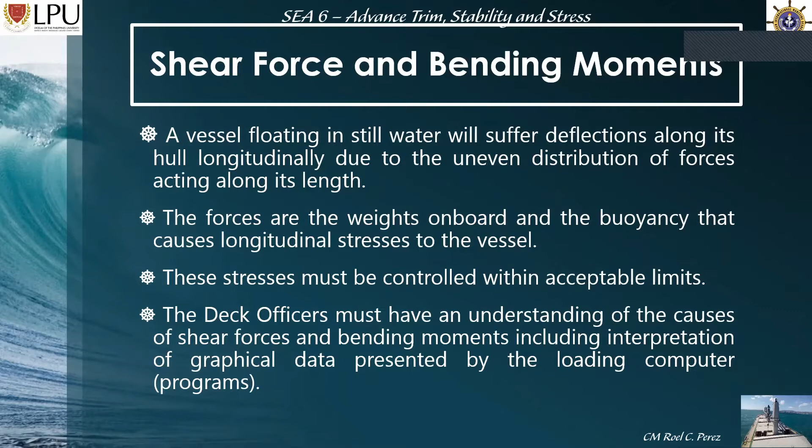A vessel floating in still water will suffer deflections along its hull longitudinally due to the uneven distribution of forces acting along its length. The weight of the ship, that is already a force. The ship is heavy and displaces water, so it has a force acting downward which is the weight, and it also has a buoyancy force acting upward.

If this is your center of gravity, that force acts downward. If this is your center of buoyancy, it is acting upward. They oppose each other but they have the same magnitude of force.

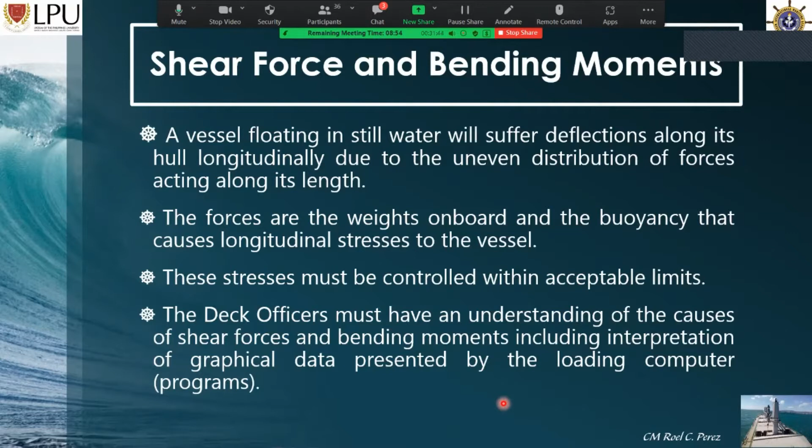Shearing forces and bending moments are experienced by a ship because of uneven distribution of weight and buoyancy acting on the vessel's length. A ship will displace a mass of water equal to the displacement of the ship in light condition. You know this already, the Archimedes Principle: the weight of the vessel, or the weight of the water displaced, is equal to the weight of the body.

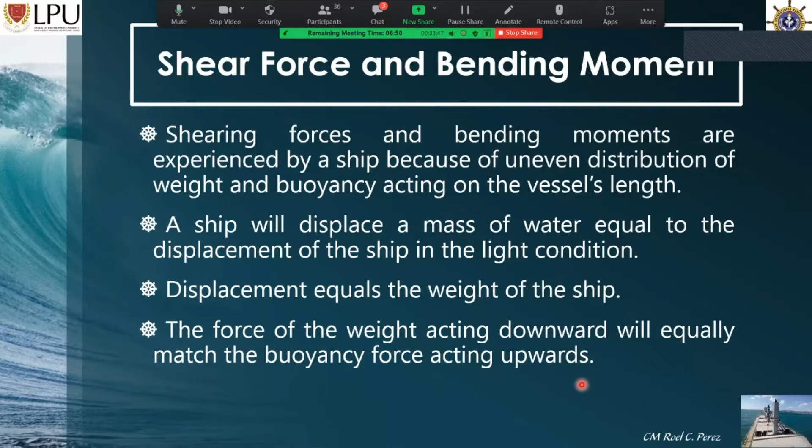Here is an example: a box-shaped vessel with three equally spaced cargo holds with light displacement of 12,000 tons. There is no stress because the holds are of the same length and the distribution of forces throughout the length is equal. For example, here there is no cargo. This is your box-shaped vessel, with no cargo, and part of it submerged. This is your waterline, and the ship is submerged, so your displacement is 12,000 tons.

Now, since the forces acting upward are equally spaced, we can divide 12,000 by 3, giving 4,000 each. So 4,000 is the upward force, which is the buoyancy force, and 4,000 is the weight force acting downward. As you can see, the weight force is equal to the buoyancy force, so there is no stress, it's fine.

Okay, and then when a weight is loaded in one of the holds, there will be an uneven distribution. For example, we load 9,000 tons in cargo hold number 2. So if we loaded 9,000 tons in cargo hold number 2, which is trimmed, I should have put trim there.

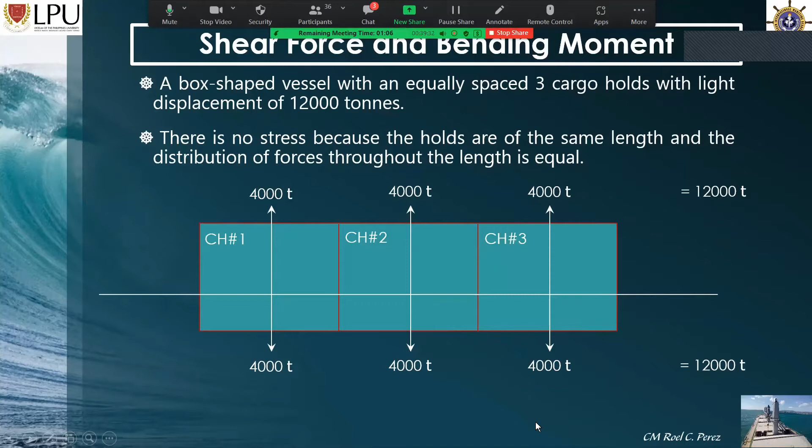But here, the buoyancy force is now more than the weight force in cargo hold number 1. And in cargo hold number 3, it's the same, there is already a difference of 3,000 tons in force. And for the weight force, there is a 6,000 tons difference.

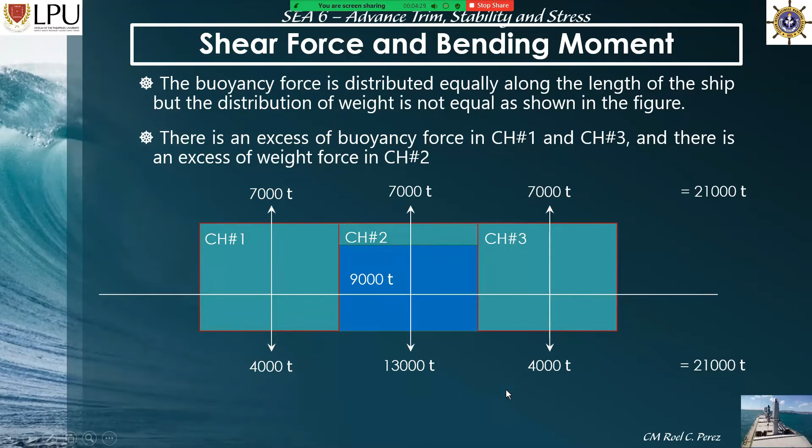And there is an excess of weight force in cargo hold number 2. Like this: 7,000 and 13,000, there is a 6,000 difference of force.

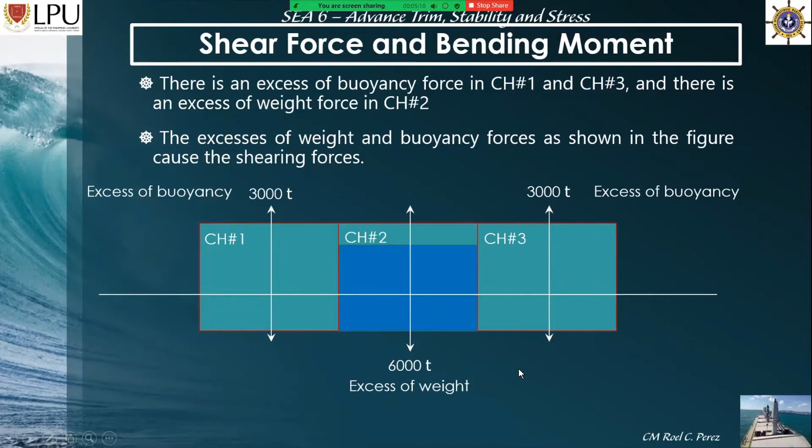Okay, so here is the difference. The excesses of weight and buoyancy force, as shown in the figure, cause the shearing forces. In cargo hold number 1, there is a 3,000 tons excess of buoyancy, and the same with cargo hold number 3. For cargo hold number 2, there is an excess of weight, which is 6,000 tons.

Okay, shear force and bending moment. Shearing forces are the vertical forces acting on the length of the ship and tend to slice the ship into different parts. Because of the shearing forces acting on the ship, bending moments will also be experienced by the ship. If the weight is concentrated in the middle of the length of the ship, sagging will be experienced by the vessel. If the weight forces are concentrated on the ends of the length of the ship, then hogging will be experienced by the vessel.

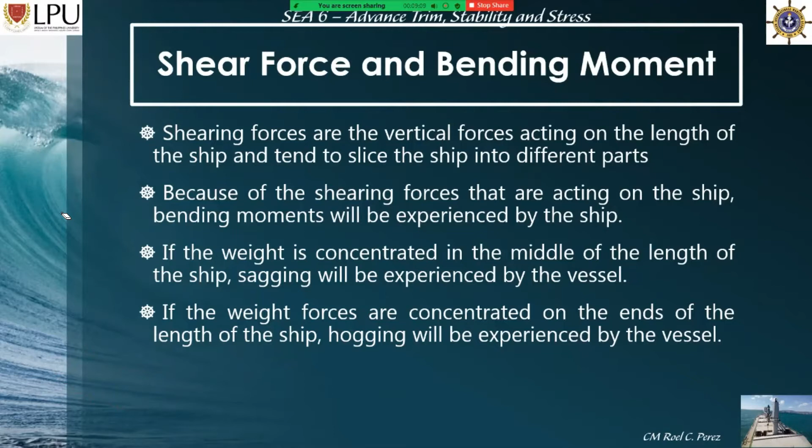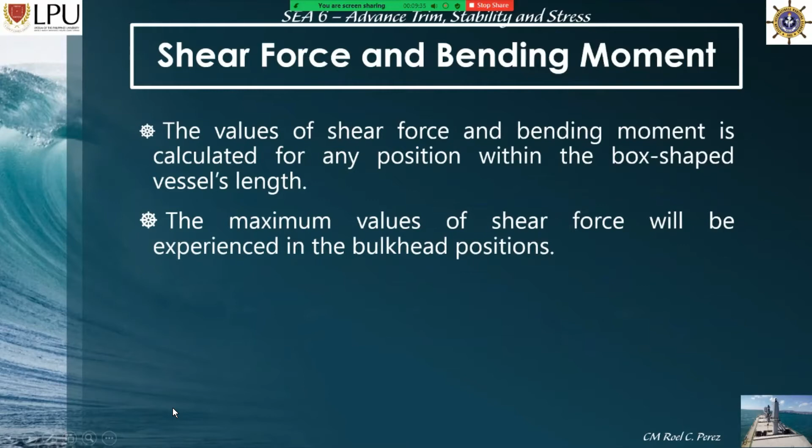Okay, so the values of the shear force and bending moment is calculated for any position within the box-shaped vessel's length. The maximum values of shear force will be experienced in the bulkhead positions. Kung nakita nyo, kung matandaan nyo yung aking drawing, ito yung drawing ko. Kung matandaan nyo ito, ang kanyang maximum, ang nakalagay doon sa aking sa ating lesson, the maximum values of shear force will be experienced in the bulkhead positions.

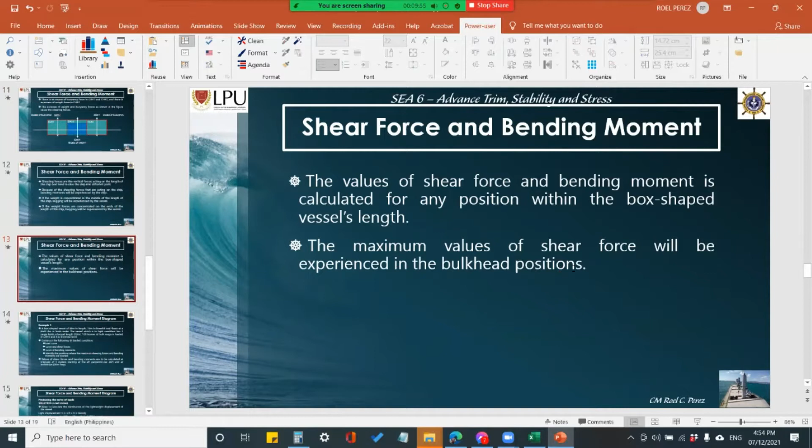Dito sa bulkhead position, ito ang bulkhead, yung hati ng bodega. Which is, kung makita mo ito, di ba? Kaya yung maximum shear force, parang kumbaga, parang magganyan siya. Pero hindi naman siyempre, bali babaluktot lang siya, magiging sagging. Kung dito ka naman nagkarga, sa dalawang gilid, magiging hogging naman, aangat naman yan.

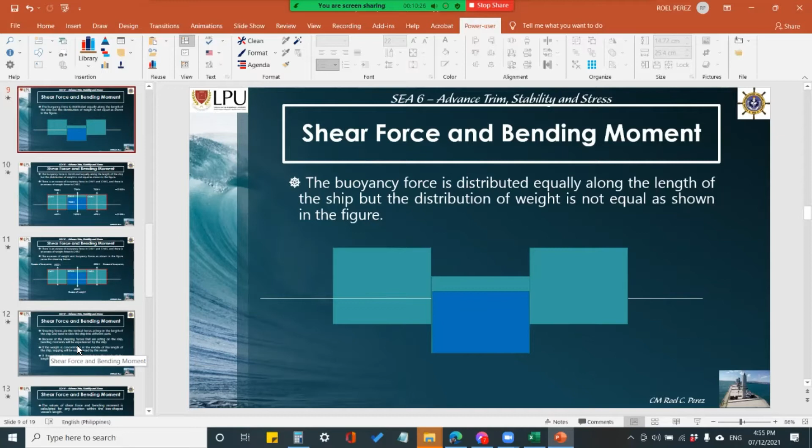Okay, so ituloy natin. Then, we have an example. Para mamaya, activity tayo. Kahit hindi pa ako tapos, at least kahit dito man lang tayo sa load curve.

Okay, so example 1: a box-shaped vessel of 60 meters in length, 10 meters in breadth, and floats at a draft of 4 meters in fresh water. Kaya fresh water ang ginamit ko muna, mamaya ipapaliwanag ko kung bakit fresh water. Kasi ang fresh water, ang specific gravity or the density is 1, di ba? Kaya mas madali mag-compute. Okay, the vessel which is in light conditions has 3 cargo holds of equal length.

So kaya 60 meters ka, tatlong cargo hold, o di siyempre 20 each, di ba? Siyempre iba yung, wag mo isipin yung sa barko, kasi sa barko ay, okay, so let me, para maintindihan nyo. Siyempre yung barko ay hindi siya box shape. Okay, forgive my drawing. Tapos may bahay tayo dyan, di ba?

Ay nandiyan ang makina, tapos ito lang ang ginagamit mo sa bodega. Kung ilang bodega yan, 5. Pagdating dito, wala na namang yung space na yan. So hindi, iba yan. Huwag mo munang isipin yan, may advance na tayo dyan, then muna tayo sa theory.

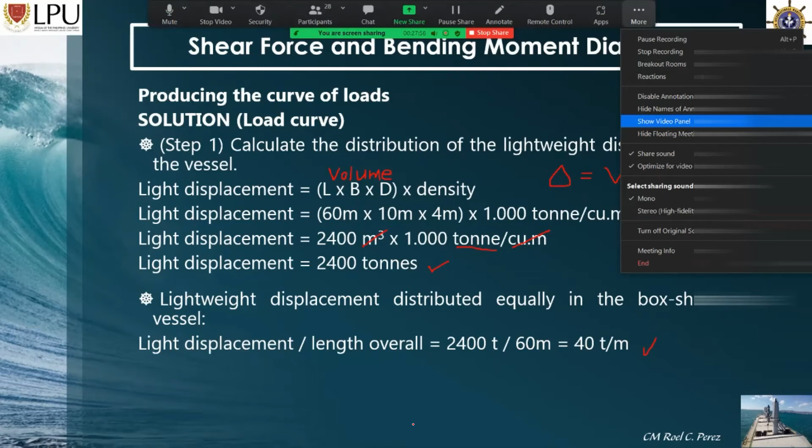Ano, naintindihan ba? Yes, na sir. Paano? Okay, yes, sir, madali lang naman intindihan, you know? And you are lucky because I believe na hindi nila ginagawa ito doon. Pero kung ginagawa man nila, hindi nila gagawin yung graph, which is tayo gagawin natin.

Ha? Okay, na step number 2. Ganun pa rin, solution for load curve. Calculate the distribution of all deadweight items, that is your cargo.

Okay, so cargo equally distributed in cargo hold number 2, that is trimmed. The formula is cargo divided by length of cargo hold number 2. So 120 tons divided by 20. Nakita nyo naman yung kanina, 100, yung 20 is length of cargo hold number 2 kasi 60 meters yung iyong length. So the length of your cargo hold number 2 is divided by 3 because it is composed of 3 cargo hold in equal length, nakalagay doon sa ating problem, no? Okay, so 120 tons divided by the 20 meters, that is 6 tons per meter.

That is on dead weight, no? Regarding the dead weight dito, regarding the cargo. That is 6 tons per meter.

Okay, so step number 3, calculate the load displacement and distribution of buoyancy force. So calculate mo yan, and then the formula is load displacement. Load displacement is equal to light displacement plus load weight or dead weight. So okay, malilito doon, ano? Okay, so that light displacement is 2,400 tons plus yung load mo is 120 tons, then your load displacement is 2,520

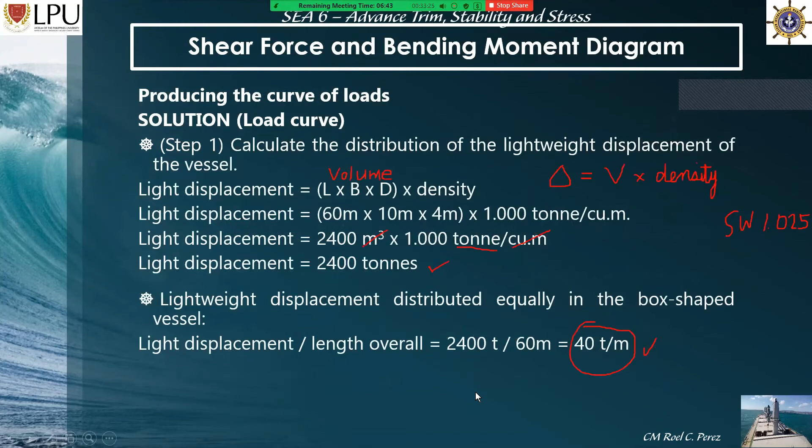Dito naman, on lightweight at saka, okay, so, tingnan natin, no? So, I can write here, keep natin.

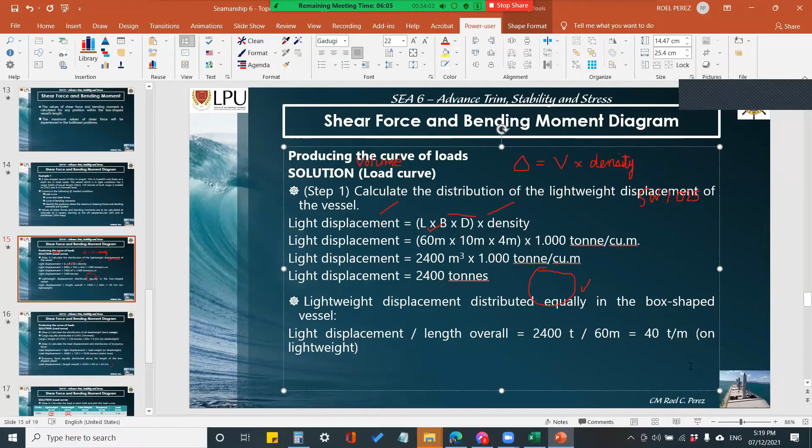Yan, no? That is on lightweight. Tanggalin ko na lang to kaya. Pati, mabasa naman pala.

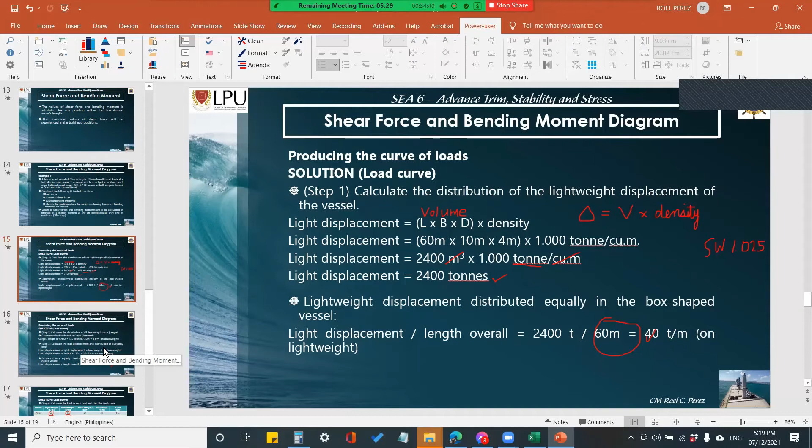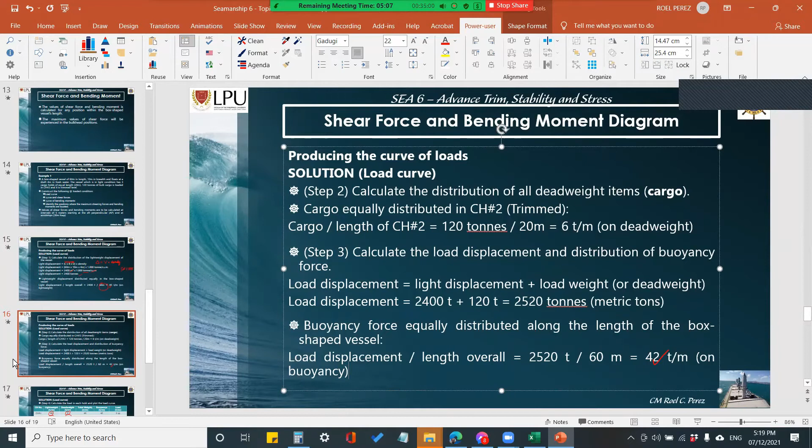Okay, so yung isa naman, nakalagay, sinulat ko na on dead weight. Dito naman on buoyancy, lagay natin on buoyancy or buoyancy force, para matandaan nyo. Okay, so I can go there again.

Okay, so anong mangyayari ngayon? So 40 plus 0 equals 40. Yan, plus natin yan. 40 plus 6 equals 46. 40 plus 0 equals 40.

So tandaan nyo, bakit 0 ito? Baka kasi wala tayong kinarga doon, no? Wala tayong sinolve din. Ito lang cargo hold number 2 tayo nag-solve. Okay, so this one is on, doon natin kinuha sa on buoyancy. Tandaan nyo yun.

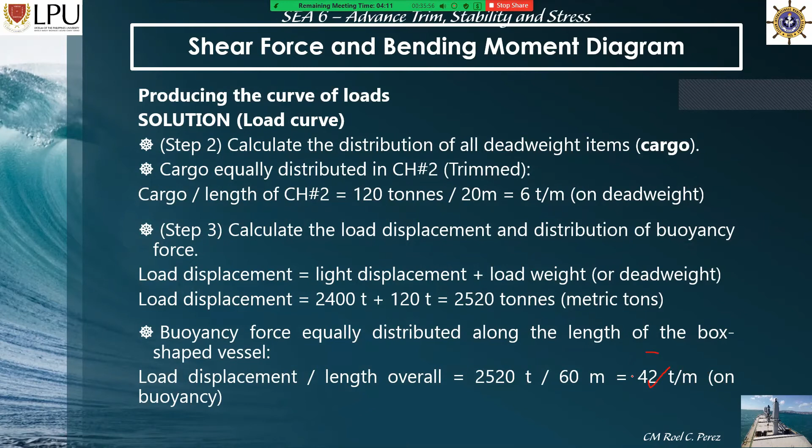On buoyancy. So, babalik ako doon. Nakita nyo ito, no? On buoyancy. 42. So, doon yun, no? 42. Okay, so anong gagawin natin ngayon?

So, tingnan mo, tumaas ba siya? Ilan yung difference nila? Yan, 2. Ngayon, dahil tumaas siya, 2 up. That is your load, no? Dito naman sa kabila, i-subtract mo. Bumaba siya, that is 4 down.

And then dito naman, 2 up ulit, no? So, makita mo, meron ka na yun. So, siyempre, pagka 2, positive yun. Pag 4, negative. Diba? So, ganito ngayon ang ating pag-plot for plotting.

For plotting, we need the x value and y value. So ang ating x value, siyempre, mag-start tayo sa 0 along the length. Along the length ito, no? So, this one is papunta ng... wait. So, this is your cargo hold number 1.

So, this is your bulkhead. Bulkhead. So, this one naman, your cargo hold number 2. Tapos dito na naman sa 40 sa 40, bulkhead na naman yan. And this one is your cargo hold number 3.

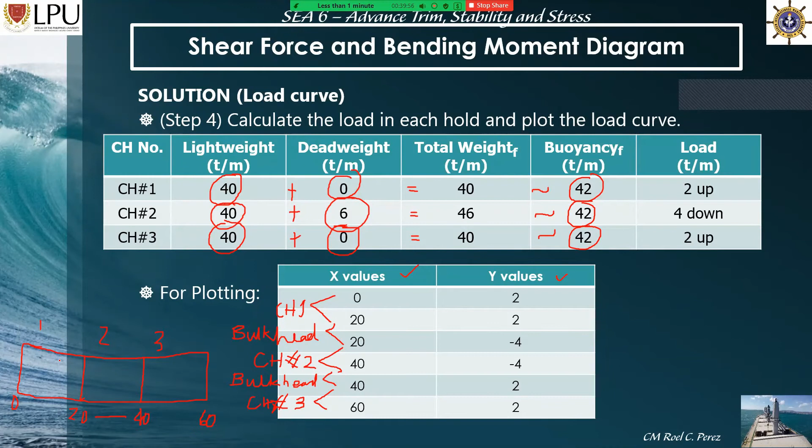Kaso dito, dadaan tayo ng bulkhead. So meron tayong bulkhead in the middle, kaya parehong 20 ang ilalagay mo, no? Kasi nandun ka pa rin sa 20, this is your bulkhead eh. Gets mo? Pwedeng sabihin ng tig-dalawa. Tapos yung pinakadulo, yung overall, yung una, siyempre 0 ka muna.

So ito ngayon gagamitin natin sa graph, no? Naintindihan niyo ba kung saan nakuha yung x values? Tig-20 po lagi, dalawa, depende sa length ng barko, no? Pagka yung barko mo, let's say, 90, siyempre tig-30 yun, gitna nun, no? At saka depende kung ilang bodega.

Kaya ganun nga, from 0 to 20, that is your cargo hold number 1. And then in between that, 20 sa 20 bulkhead yan. Ibig sabihin hindi ka lumipat, nandito ka lang. Bulkhead.

Tapos 20 to 40, that is your cargo hold number 2. Yan. Tapos in between na naman, bulkhead na naman, that is your 40. Kaya hindi ka lumipat from 40. Tapos 40 to 60, that is your cargo hold number 3. Length, no? Ngayon yung values mo...

Okay, so yung Y values, ginamit natin itong up, down. Up, down, and up, no? So 2, galing dito papunta roon, that is 2, no? Ngayon, dahil hindi ka pa naman lumilipat, nandiyan ka lang sa bulkhead, so 2.

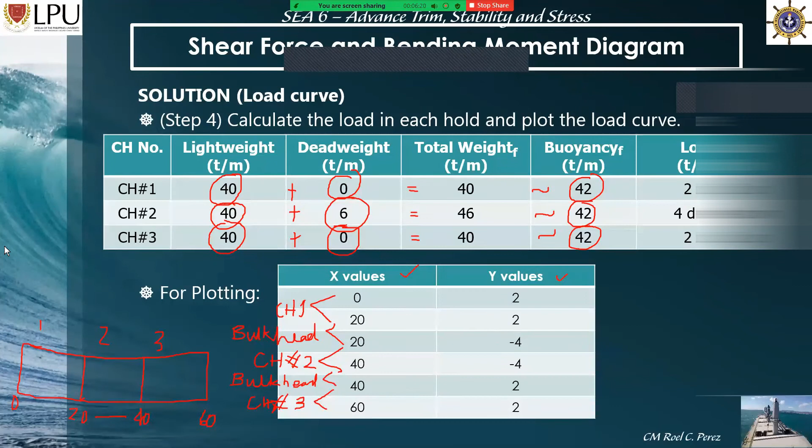So ang purpose nung ganito, i-drawing ko, no? Ganito kasi yung magiging mangyari sa graph mo, no? So kung yung 2 mo, this one, let's say this one 2. Okay, so let's say ito ang 0 mo, lagay natin ito ang 0. Sample lang, no? Just to explain.

Okay, maalon, maalon. So, ito yung 2 mo. Tapos, bababa ka ngayon ng negative 4. Ito yung 2, ito yung 0, ito yung negative 4. Ganyan lang mangyayari sa graph mo. Tapos, papunta ka doon ngayon, negative 4 pa rin yun.

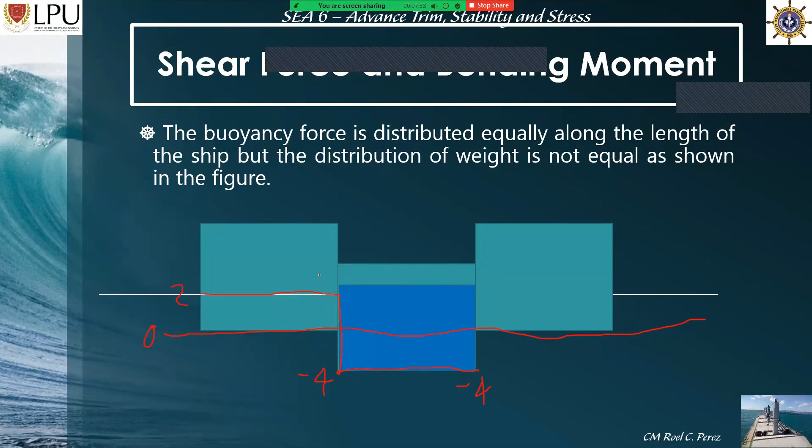Dito kasi, sir, ito, sagging din po. O, sagging siya. Sagging. Kasi, basta dito ka sa gitna nag-load, sagging yan. Tapos, dito ngayon, aakyat ka na naman sa 2. Tapos, ito ngayon, 2. So, yan yung iyong y value, no?

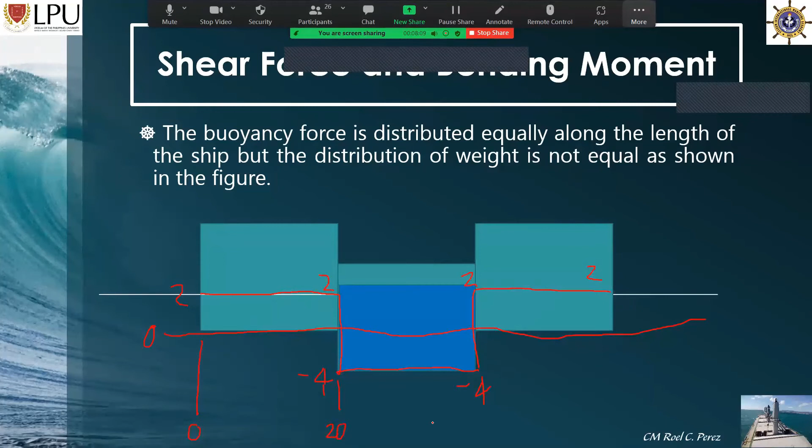Yung x value mo naman, ito naman siya. That is 0. This is 20. This is 40.

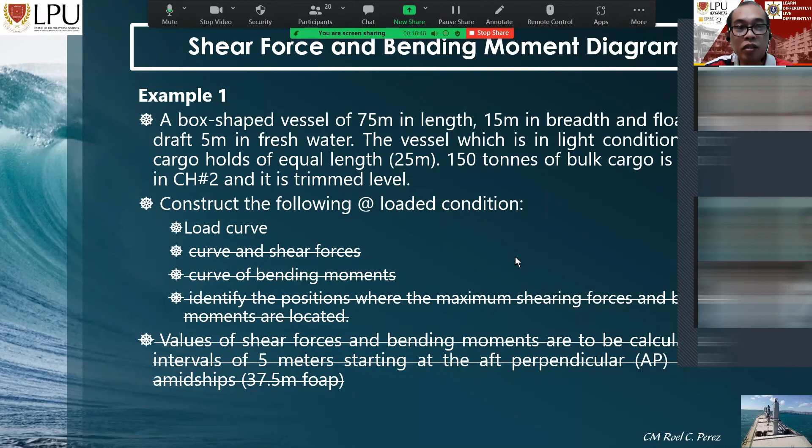Makita mo itong magiging Y value mo. Ito yung na-solve mo dito. Yung X value, syempre ito, kasi 60 lang yung inyong length overall. Pero katulad ng 75 na yung magiging length overall mo, ang hati niya ngayon divided by 3 is 25. So 0 to 25 ka na ngayon dito, tapos 25 to 50, tapos 50 to 75. Ang mangyayari nito, papalitan mo lang ito: 0, 25, 25, 50, 50, 75. Dapat maintindihan nyo, hindi yung sinasabi ko lang.

Tapos ito naman, kung ano makuha mo dito, isosolve mo pa yan. Kung ano makuha mo dito, yan ang isusulat mo. Katulad dito, 4 down, that is negative 4. Ito naman, 2 up, ilalagay mo dyan sa cargo hold number 1 mo.

Bali po, dalawa po ng dalawa? Oh, dalawa kasi ito yung length mo ng iyong cargo hold. Katulad dito, mula dito hanggang doon, yan yon. At saka if you remember yung graph, ito siya, 2, hanggang doon sa 20. Kaya dalawang 2 ka.

Tapos pagbaba ka naman, dalawang 20, kasi along the x value of 20, or horizontal axis. Tapos dito na naman, negative 4 ka, dalawang negative 4 na naman, along the y-axis na negative 4. Pero 20 to 40. Tapos pag nandito ka na naman, negative 4 saka positive 2. Pero dalawang 40, yan lang dyan ka sa 40, kung saan nag-meet yun. Yan ang gagawin mong graph.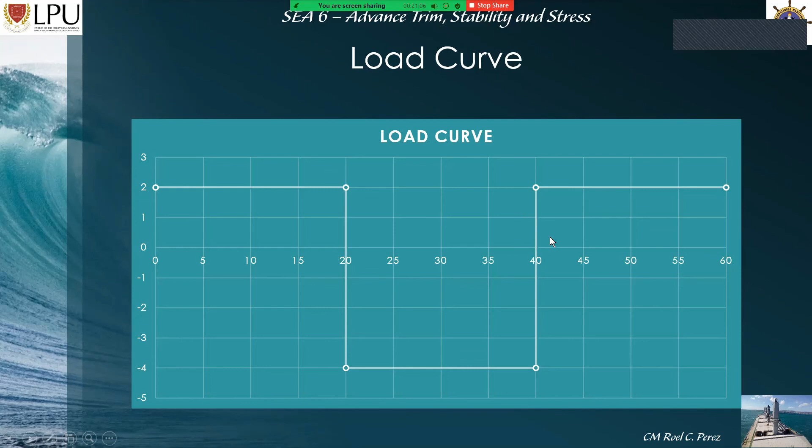Naintindihan ba, sir, dyan sa chart, yung X and Y, i-insert lang po yun. Ito pong X and Y na nakuha. Ito nga, yung X mo, pinaliwanag ko na, that is the length of your cargo hold. Insert lang number 1 yun, length, mag-a-appear. Oo, pagka ginawa mo yung graph, katulad din ng paggawa natin ng graph ng una, lalagay mo lang doon.

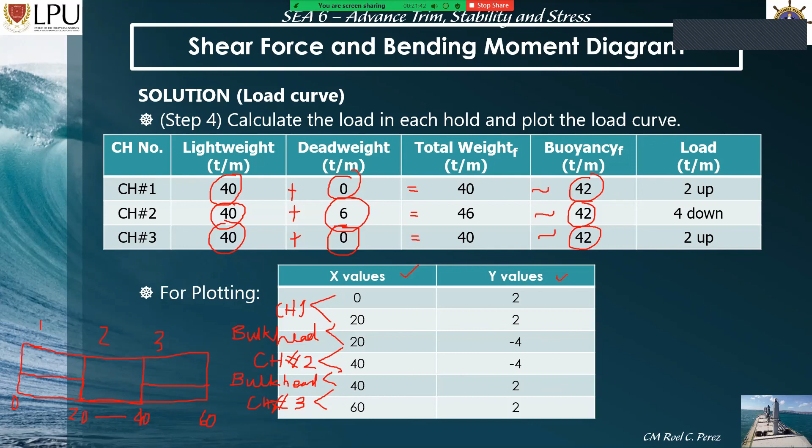Click mo lang to, insert chart. Dito, insert chart, insert chart. Pasensya na po sir, mahina po ang signal ko po ata.

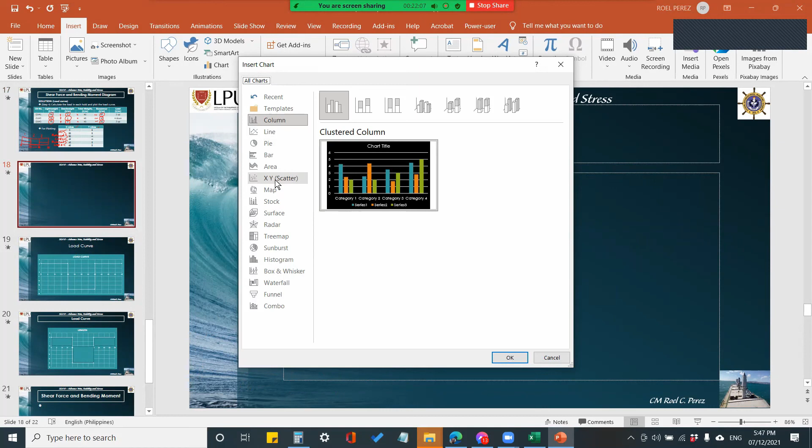Piliin mo yung X and Y scatter, para rin yung dating ginawa natin. Kaso yung ginawa natin noong una, ang pipiliin mo ay yung scatter with smooth lines and marker. Pero ngayon, ang gagawin natin is scatter with straight lines and marker. So yan ang i-click mo ngayon. Pag na-click mo yan, okay.

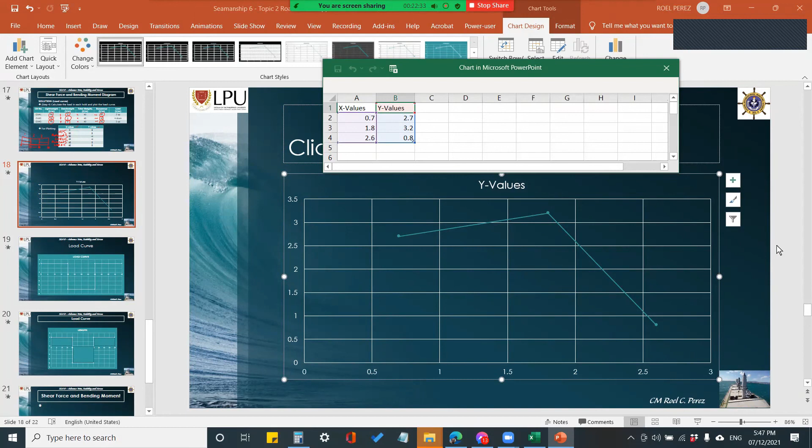Kita mo, lalabas ngayon yung Excel. Mamaya na tayo magpalit ng kulay. I-type mo lang ngayon yung nakasulat dito. Okay, so ano yung X value natin?

Okay, pwede mong dire-diretso yan: 0, 20, 20, 40. Ngayon, kung mahaba yung barko mo, ilang bodega, let's say may 60 ka pa dito, pwede rin yan. Tapos may 80 ka pa dito, tapos 80, tapos 100 yung length mo, di 100 yung uli. Yan, pwedeng ganoon, pwedeng ganyan.

Tapos dito naman sa kabila, let's say, ang nakuha natin, 2 up, di ba? 2, tapos 2. Tapos negative 4, tapos negative 4, dalawang beses mong isusulat yon yung negative 4. Tapos positive 2, dalawa din, positive 2.

Okay, so let's say na meron ka pa, ginawa natin 4 na bodega or 5, so pwede rin yon. Okay, example ko lang, pwede naman natin tanggalin mamaya. Okay, kung ilalagay mo naman dyan ay let's say, ay positive 3 naman. Positive 3, pwede rin yan.

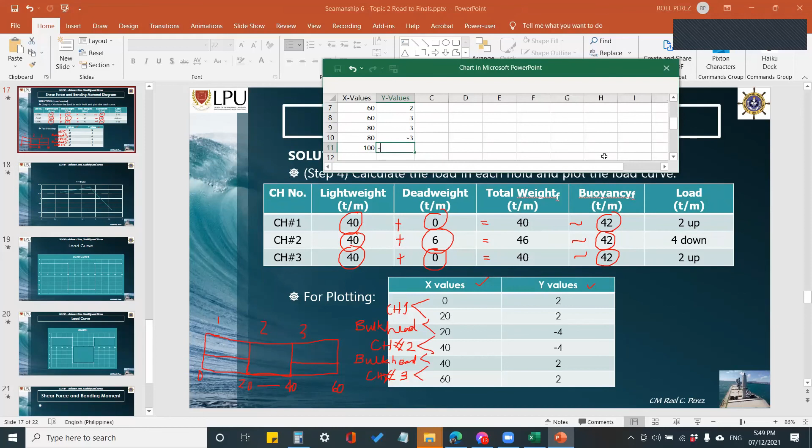Tapos dito ay positive 3, tapos dito naman ay negative 3 naman. Tingnan natin kung ano magiging graph natin. Negative 3, dalawang beses mo ilalagay. Tingnan natin yung graph.

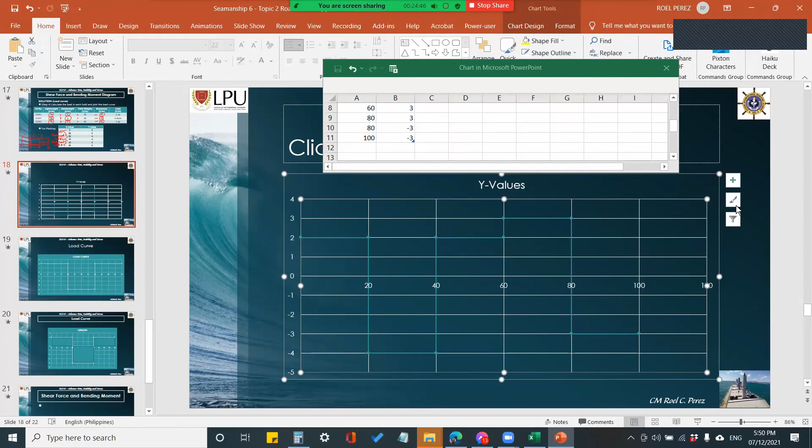Nakita nyo yan? Tapos palitan natin ang kulay para makita, hindi kasi makita rin. Yan, ganyan ang nangyari sa graph mo, kasi ginawa natin na 5 bodega: 1, 2, 3, 4, 5.

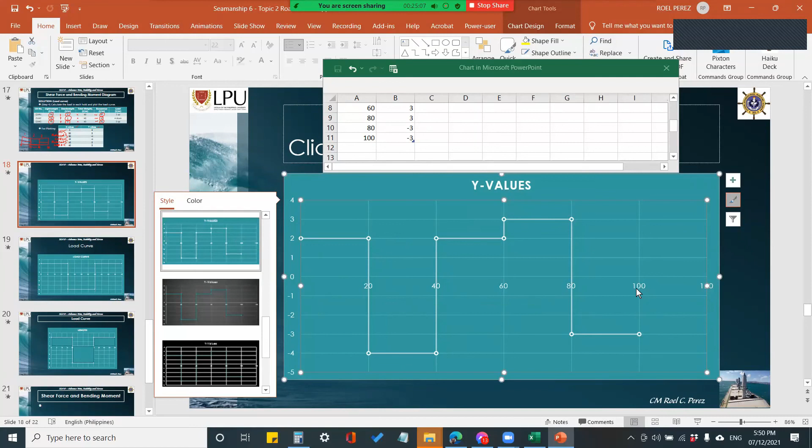5 bodega yan. Tapos i-click mo lang itong horizontal value axis, format axis. Yung major, pwede mo nang di galawin yan. Yung maximum na lang, pwede mo ilagay na 100 lang para dulo sa dulo. Okay, pag click mo yan, yan ang magiging graph mo.

Pero yung atin kasi ay 3 bodega lang, so tanggalin natin. Hanggang ano lang tayo, hanggang 60, clear contents. Yan, automatic, tapos papalitan mo lang yung maximum dito. Yan na, the same, di ba? Pwede mo na i-close to.

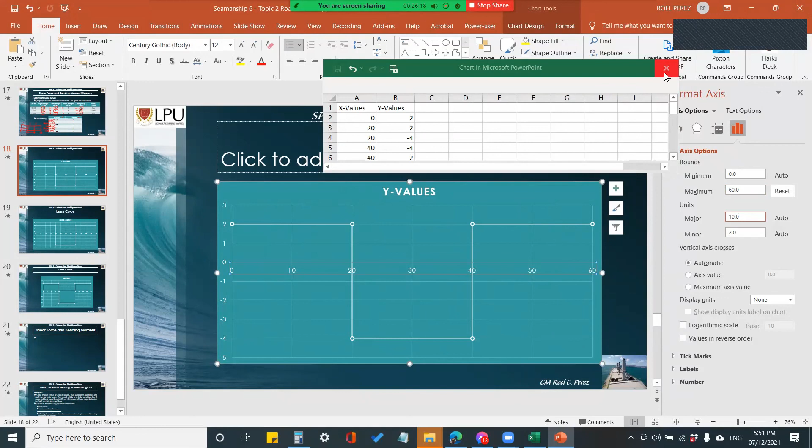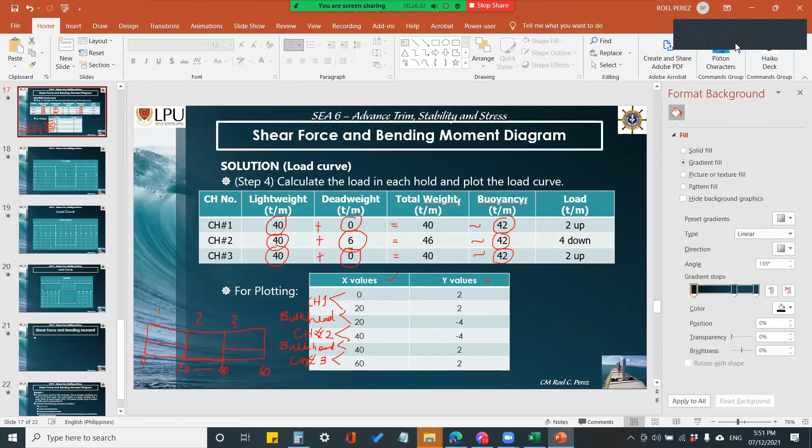Yun, so ito lang magiging problema nyo noong nakabalito kayo dito, sa X value sa Y value. Naintindihan ba? Naintindihan na po, sir. Okay, good, kung naintindihan na, then I can stop sharing.